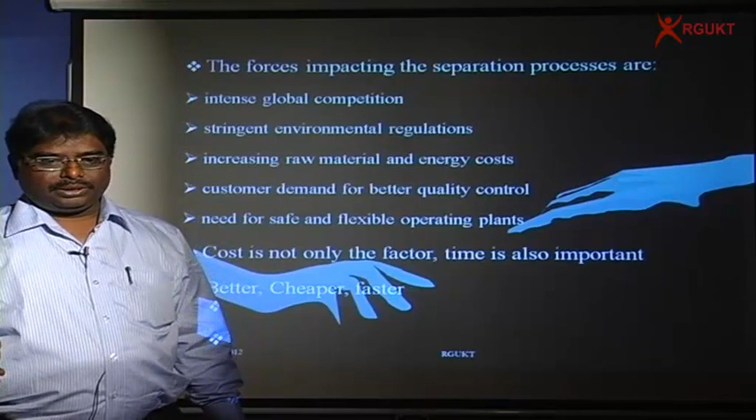Maybe you feel that the course is a mass transfer operation, and we are talking about a separation process. The separation process is an application of mass transfer operations. In your courses, mass transfer operations 1 and 2, the first few modules discuss the importance of transport phenomena in mass transfer operations, but the remaining topics we'll discuss are the applications.

I would like to explain to students the importance of the separation process, and I want to convince you that without a separation process, mankind cannot sustain. Once you understand this, then one can discuss what mass transfer is, how it takes place, how to calculate the mass transfer flux, how it relates to heat transfer and fluid mechanics, and how to conduct mass transfer operations. All those things I would like to explain at a later stage.

So initially, what I want to talk about again is the separation process, the importance of the separation process, why one should think about it. If there is no separation process, nothing is there.

So we were discussing the separation process, different applications of it, and I have already given several applications. In the last class we discussed the forces impacting the separation process. Today the customer wants a better product, a cheaper product, and at a faster rate, and that is only possible with you - with you meaning the chemical engineering students, not anybody else.

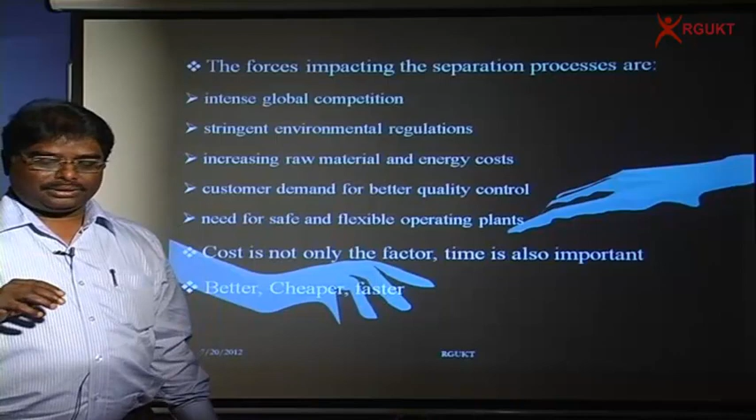With this small introduction, I want to continue my previous class discussion. The above forces are leading to the utilization of multiple separation technologies for certain applications. We don't like to use one separation technology; we want to use multiple separation technologies, innovations at a small scale, and increased use of integrated separation and hybrid processes.

Then improvement in energy efficiency, creation of separation methods for ultra high pure chemicals, development of separation processes for waste management. For example, when we talk about utilization of multiple separation technologies for certain applications, the same example I gave earlier is the ethanol water system.

We get ethanol from the fermentation broth where it contains around 10% alcohol, and that 10% alcohol has to be increased to 99.8% or 99.7% alcohol if somebody wants to use this alcohol for fuel applications, maybe for drug applications.

If that is the case, what one has to do is use distillation, because distillation is a well-known separation technology used for the separation of liquid mixtures.

But as I told you already, unfortunately the system of water and ethanol forms an azeotrope at 95.6% concentration. We cannot use distillation.

We have to go for azeotropic distillation and extractive distillation, where we add an extra component. When you add an extra component, you need to remove this extra component, and the cost of the process increases. So instead of that, what one can think about now - a recent approach - is using a clubbing of multiple separation technologies, not just one.

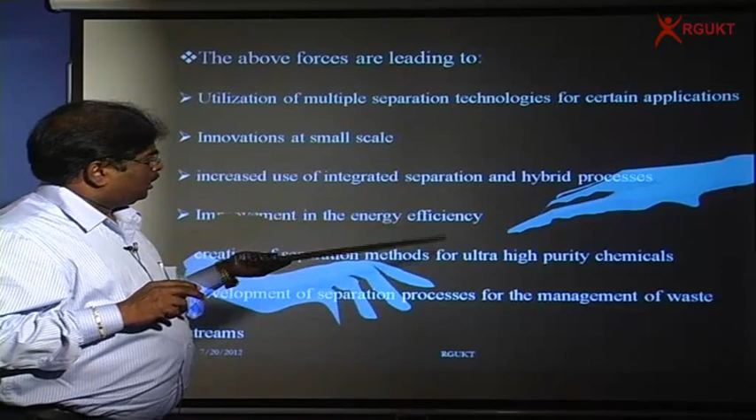Then there are innovations at a small scale, as I already told you about the fuel cell development in Japan by a small company which can produce 1 kilowatt hour. So they are doing whatever innovation they want at a small scale, satisfying the needs at a smaller capacity. So we want to do innovations at a small scale and increase the use of integrated separation and hybrid processes.

As I told you already, we don't like to use just one technology. We use multiple sub-technologies to make the process a hybrid separation process. This is what I spoke about regarding the pulp and paper industry. When you get black liquor, instead of using some other technique, we can use the membrane separation process with ultrafiltration, nanofiltration and reverse osmosis. So we use a hybrid process for improvement in energy efficiencies.

This is what I told you: instead of using distillation and azeotropic distillation, or distillation and extractive distillation, one can use pervaporation, distillation and pervaporation. That will give you more energy efficiency.

To tell you a small story again: if I want to get 99.7% alcohol, and I give this problem to American engineers, they don't design the distillation column to get 99.7% alcohol - they design it to get 99.8% alcohol. When they design for 99.8%, that means excess design, for that extra 0.1% concentration, and the energy costs increase by 13%. But if you give the same problem to Japanese engineers, they design exactly for 99.7%. Why does this difference come about? As I told you, by this time you know a little bit about process dynamics and control.

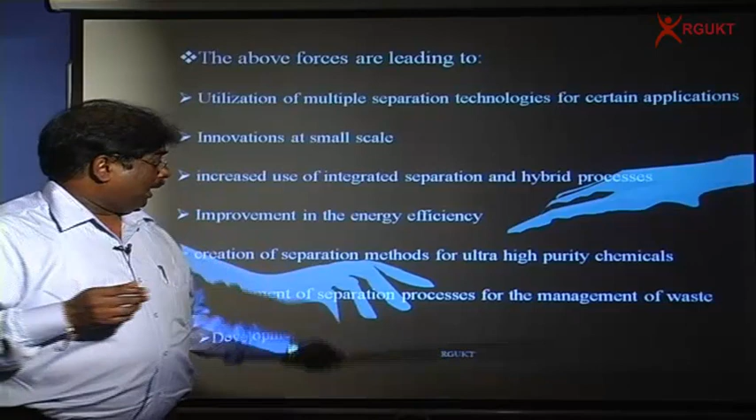Otherwise, the product you get has no value, and no customer is going to purchase it. So there is improvement in energy efficiency and the creation of separation methods for ultra high pure chemicals. When you talk about semiconductor applications, we need high pure chemicals, and to get them we have to use some new separation techniques to produce these ultra high pure chemicals.

To tell you a small story again: people talk a lot about cool drinks. They say cool drinks are not good for health. The same cool drinks we were drinking since maybe 1960 onwards, but suddenly people started talking about pesticide traces in cool drinks, and that one cannot drink them. But these pesticide traces were already there in the cool drinks even in 1960, it's not new. The reason was, earlier the system was not so sophisticated.

Your control systems were not sophisticated, or your measuring devices were not so sophisticated. If the concentrations are very, very small, they are not traced by the instruments, so we are not able to get the concentration. But now, because of developments in electronic systems and electronic materials, we are able to develop advanced instruments like gas chromatographs which can detect concentration even at the ppb level, parts per billion. So what was once called a good material is now becoming a waste material.

Even if that is there, if you don't like to drink a cold drink which has a concentration in terms of ppb, what one can do is use some separation process to remove those low concentrations of pesticides, and provide a cool drink which the customer wants. So we need the creation of separation methods for ultra high pure chemicals. This is what even semiconductor applications require.

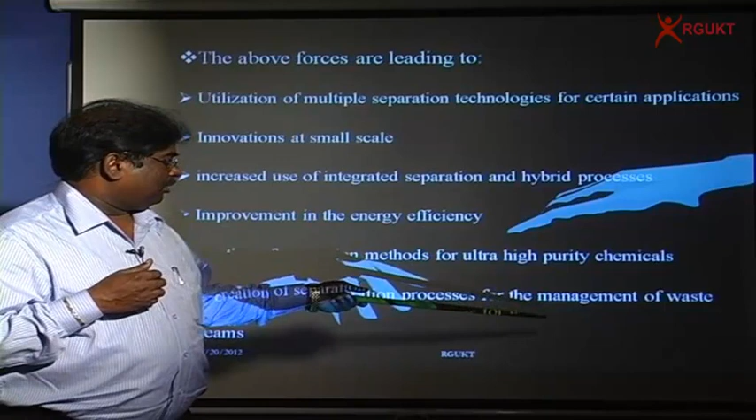So these are the forces that I told you about, the forces impacting and leading to these things.

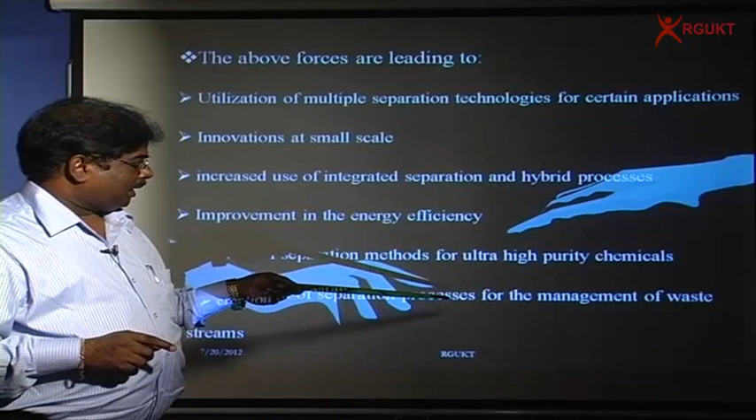So maybe it is a good time for you to look at this course and understand its applications. When you go through these applications, you yourself will feel there is so much scope, particularly in the area of separation processes, in the area of chemical engineering, and I can assure you that you can do wonders in life.

Just to spend one more minute on this: management of waste streams. As I told you, the toluene-water system. If you take any petrochemical industry, the water coming from it may contain toluene, maybe benzene, maybe xylene.

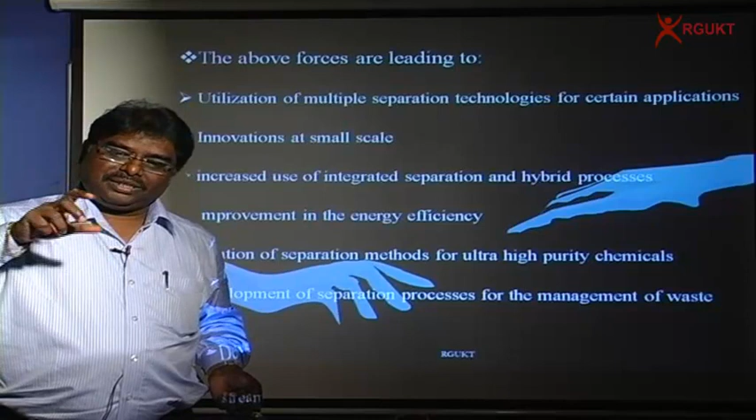When water is alone, there's no problem with its quality. If toluene is alone, there's no problem either. But when toluene and water are mixed, in the presence of water, the activity of the toluene increases. When the activity of the toluene increases, it creates an irritating smell, and we cannot use that water for drinking purposes.

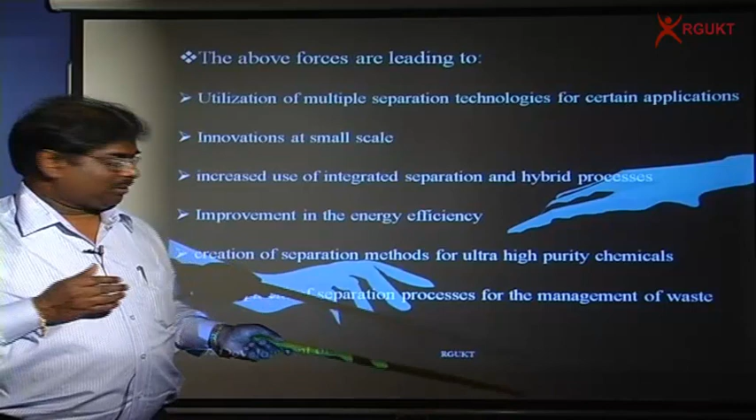So what we are doing is generating waste, and if we continuously generate this waste, someday, as I told you already, there will not be any space to store it.

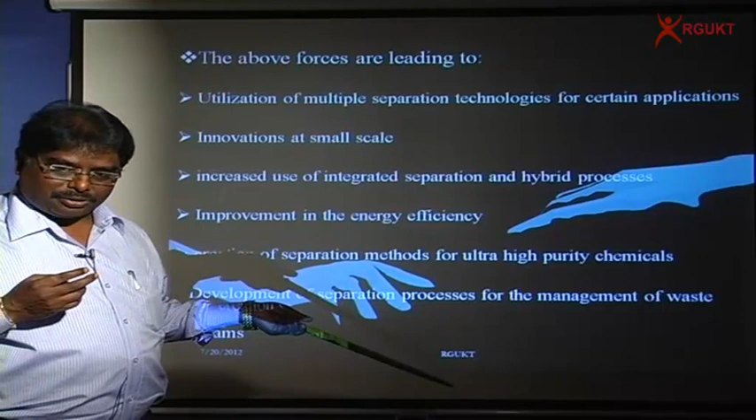So today people are using technologies like carbon adsorption, stripping processes, and pervaporation processes to recover or separate the wastes so that you can use this waste.

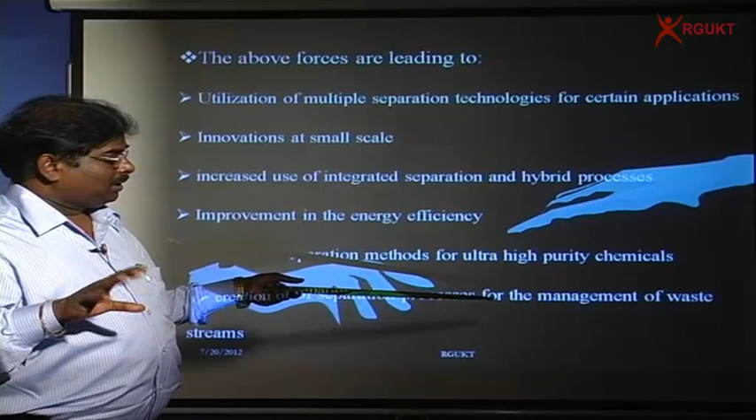Another example: in the case of the pulp and paper industry, we get waste in the form of black liquor. Using a series of membrane separation processes, we get lignin as a byproduct, and this lignin can be used as some sort of adhesive. That is what we are trying to do: the management of waste.

By this time you understand that there are several separation processes available, and for the same product, you don't need to use just one separation process—we can use a series of them. For example, in the ethanol and water system, we can use distillation, azeotropic distillation, extractive distillation, liquid extraction, adsorption, pervaporation, or crystallization.

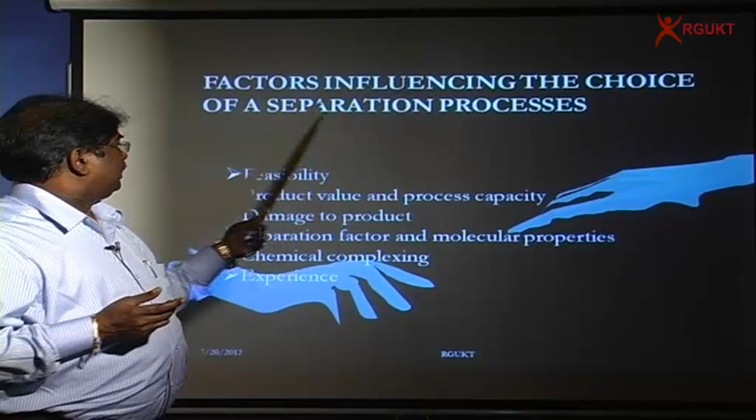So when a customer comes to you with a solution and asks what separation technology to use, you immediately face several doubts about which technology to choose. There are several factors influencing the selection of the separation process: feasibility, product value, process capacity, damage to the product, separation factor, molecular properties, chemical complexing, and experience.

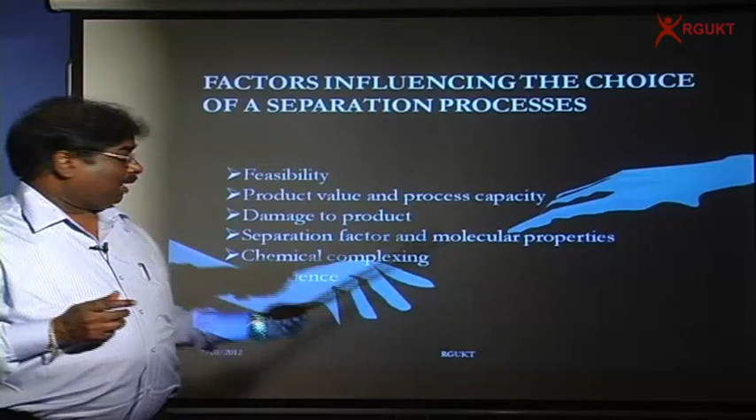These are the factors one should look at. As I told you already, feasibility is the most important thing, and most screening of a separation process can be accomplished on the basis of feasibility alone. We have technical feasibility and economical feasibility. In the case of technical feasibility, when somebody comes and asks you, you have to look at whether it is technically feasible or not.

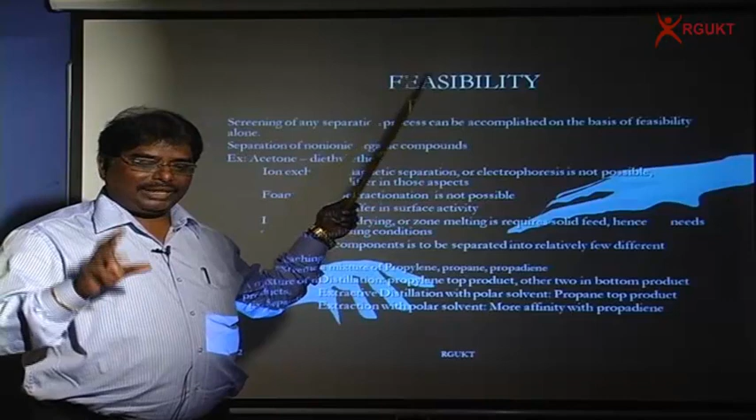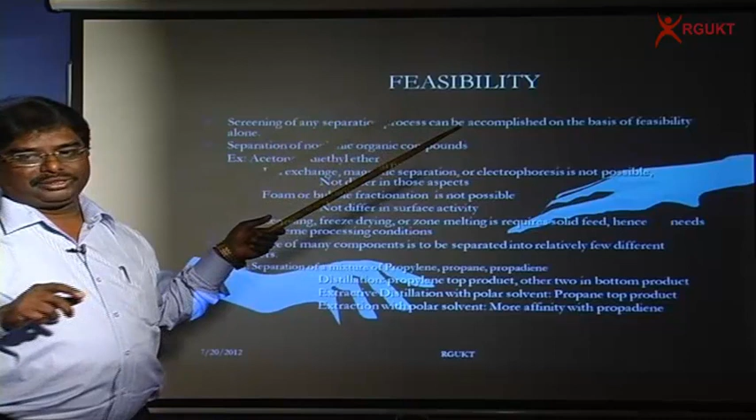Suppose I want to separate isomers, azeotropes, or substances having the same boiling points—I cannot use distillation. So it is not technically possible. When a technique is not possible technically, there is no point in thinking about economical feasibility. So when selecting a separation process, we have to look at two things: first, technical feasibility, whether a given separation process is feasible or not; if it is possible, then we think about economical feasibility; and if economically feasible, then we select that separation process.

For example, suppose I want to separate something—let me give another example. People talk about pitchblende, a mixture of uranium isotopes, uranium-235 and uranium-238. When I want to separate these uranium isotopes, I cannot use distillation, even though I know the energy requirements and costs by distillation are cheaper compared to other separation processes. But I cannot use distillation because these uranium isotopes have the same vapor pressures.

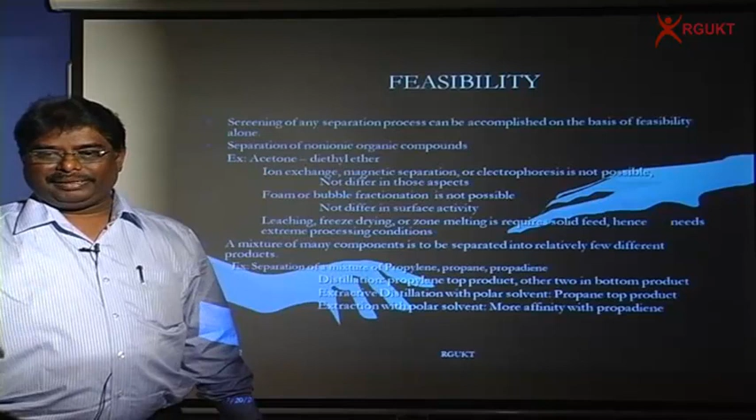So what technique do people use today? Separation of uranium isotopes by membrane gas separation. Even here, this process doesn't give a good selectivity or good separation factor, but even today there is no other separation technology besides gas separation by membranes for uranium isotopes. If you look at a uranium isotope separation plant, there will be around 300 to 400 stages, and you go through some sort of corridors—that is a very interesting application to see.

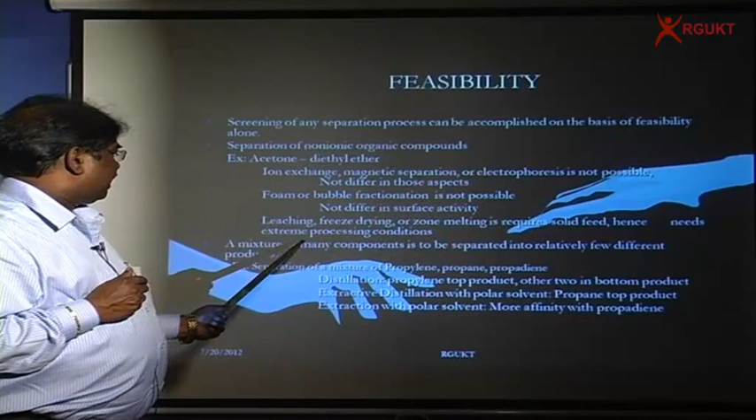Similarly, for acetone and diethyl ether, we cannot use ion exchange, magnetic separation, or electrophoresis, because there isn't much difference in those properties. We cannot use foam separation or bubble fractionation because there isn't much difference in surface activity. We cannot use leaching, freeze drying, or zone melting either—leaching requires a solid feed and extreme processing conditions. Since acetone and diethyl ether are both liquids, you would have to reduce the temperature to convert the liquid into solid, then add a solvent to leach it. Going to such extreme processing conditions is very difficult, which is why we never consider leaching to separate acetone and diethyl ether.

Similarly, a mixture of many components is to be separated into relatively few different products. Example: separation of a mixture of propylene, propane, and propadiene. If you use distillation, you get propylene as the top product, with the other two as bottom products. If you use extractive distillation with a polar solvent, you get propane as the top product.

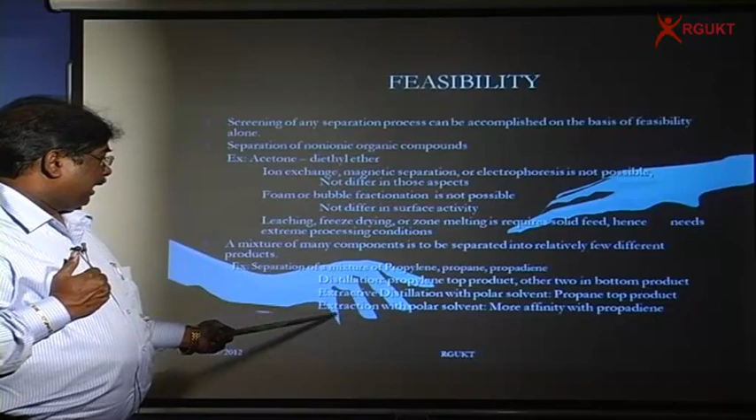And if you use extraction with the polar solvent, the propadiene goes to the other side, and you end up with propylene and propane together. So what I want to tell you is, if you have a mixture of propylene, propane and propadiene, it depends on what is the desired component for you. You can select distillation, extractive distillation, or extraction with a polar solvent. So feasibility is the most important point one has to look at.

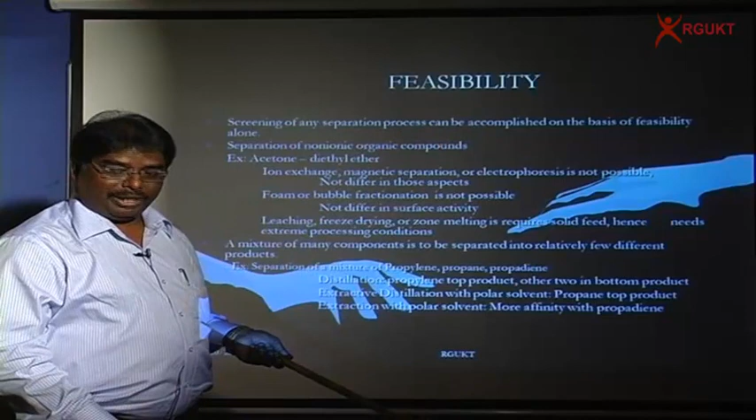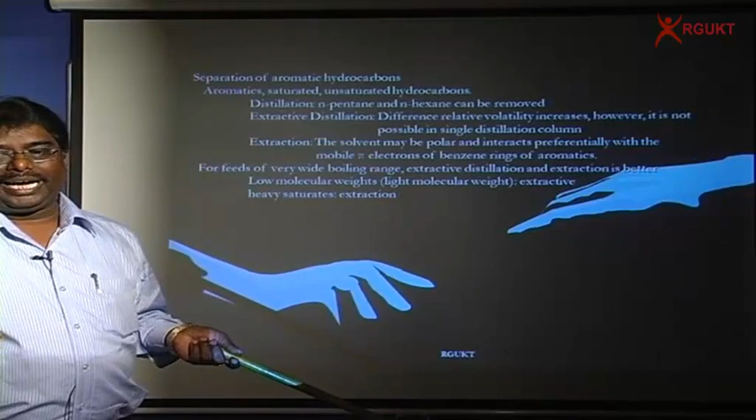Then the separation of aromatic hydrocarbons. Many of you know today there is a challenging task for the separation of aromatics and aliphatics, particularly C5 to C12 compounds. When you take crude petroleum, one of the streams you get contains C5 to C12 aromatics as well as aliphatics. And when you want pure forms, what happens is there is an overlapping of the boiling point temperatures. Because of this overlapping, we cannot separate it by distillation.

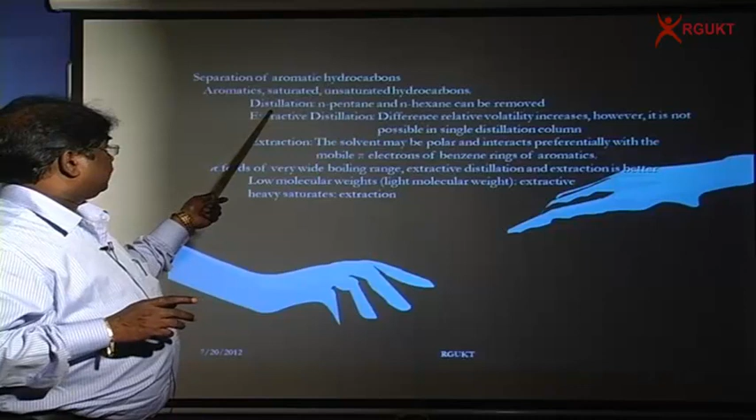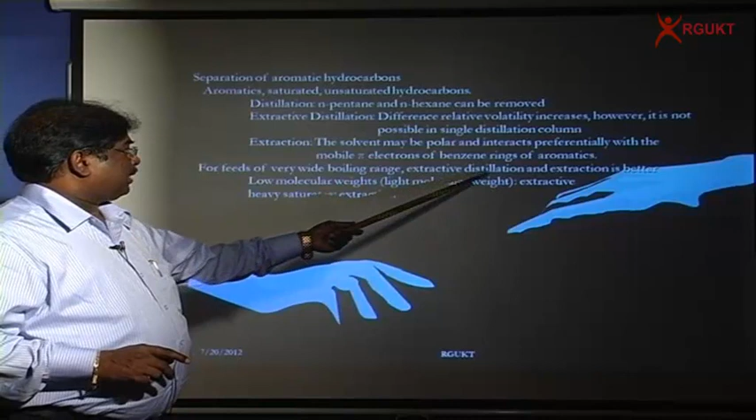So you can use extractive distillation, or you can use extraction. For feeds of very wide boiling range, extractive distillation and extraction are better. For low molecular weights and heavy saturates, we can use extraction. And this is what I told you already.

The product value is the most important thing. What is the product that we are going to get? What is the value of the product? Based on that you have to select a separation process. To give you one small example: cleaning of clothes, particularly a silk saree.

What we can do is take a silk saree and wash it, and after washing it we have to remove the excess water. If you want to remove this excess water, you have to squeeze it. When you squeeze it, the water in the cloth gets expelled, and you get the saree back, but by the time you've squeezed it, your saree gets damaged. Your product is getting damaged. Your product is a high value saree, and using a technique called squeezing causes this damage. So the reason is we go for a technique called drying operations instead.

In the case of the drying operation, we have a saree, and we have to wash it, but we are not going to wash it with water, we are going to wash it with some organic solvent. That is what we call dry cleaning. When you do dry cleaning, you use organic solvents, and wherever mud and other particles are present, they get transferred to the solvent layer, and finally your saree contains some amount of that organic solvent here and there. So what we use...

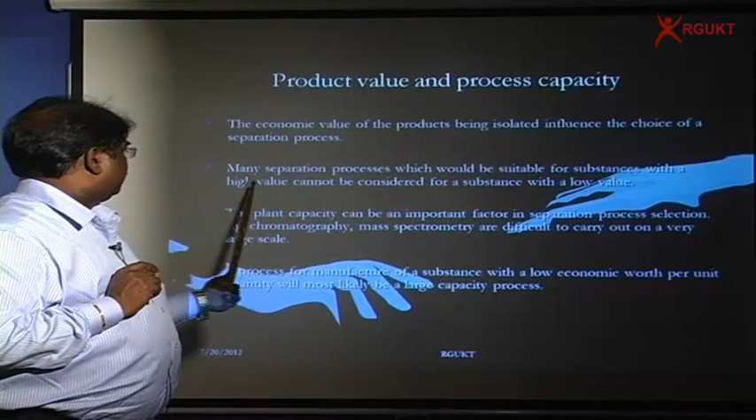...is a technique called drying, where we pass dry gas. When we pass the dry gas, whatever organic compounds are present, which is nothing but methylene chloride, gets transferred to the gas phase, and you get the saree back with no damage to it. This is what I told you: the product value is the most important thing, and based on the product value you have to choose the separation process. Many separation processes suitable for substances with high value cannot be considered for substances with low value. And another important factor we have to look at...

...just to give you one more example for product value: nowadays everybody talks about refined oil. As you know, to get the oil, say groundnut oil, which we use for cooking purposes, we have groundnuts that contain oil, and what we do is crushing. When you do the crushing, the oil gets expelled, and now that oil will be there, along with the cake.

We use filtration. When you use filtration, the oil will pass through the filter cloth, and you are going to get oil. The quality of the oil is not that good, and if you want to sell this oil in places like Banjara Hills, it's not possible, because the customer is expecting a high value product.

Then alternatively, one can think about a leaching process. In the case of leaching process, we have oil seeds. What we do is contact them with hexane solvent. When you contact with the hexane solvent, the oil has affinity with the hexane solvent. The oil will be transferred to the hexane layer, and the impurities are going to be left over.

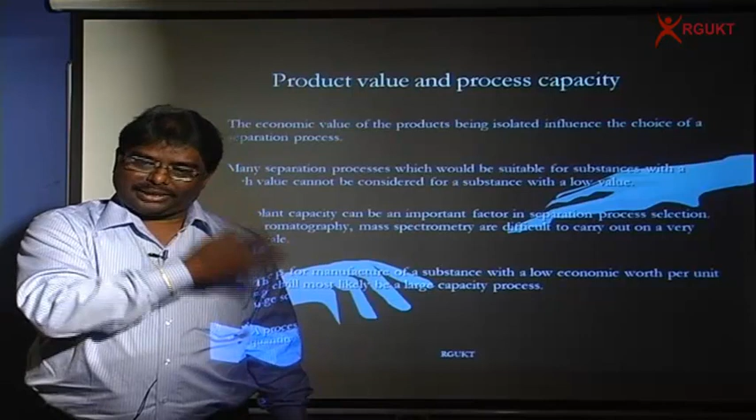So in both cases we are going to get groundnut oil only, but the cost of the groundnut oil may be 40 rupees when you use mechanical operations like crushing and filtration. When you go for mass transfer operations, the cost of the oil may be around 80 or 90 rupees. So whatever that extra 50 rupees is, you are spending towards the separation technique you use.

This is what I told you - nowadays you find so many mineral water plants everywhere. Somebody is selling at 20 rupees, somebody at 50 rupees, and sometimes we feel this fellow is trying to cheat me by selling at a higher price. That is not right, because the other one may be using good technology, maybe a good reverse osmosis membrane, while this fellow may not be using a good reverse osmosis membrane. That is the reason the product quality is less, and because the product quality is less, obviously the cost will be less. So the product value is the most important thing.

Similarly, process capacity is the most important thing. You have to see whether you are working with grams, kgs, or million kgs - whether you're working with milligrams or with million kgs.

For example, when you want to separate ethanol and water, if the ethanol concentration is very, very small - let's say maybe 1 milligram - I cannot use distillation. If I use distillation, whatever 1 milligram is there will stick to the walls of the distillation column, and nothing comes out. Whereas you can use the chromatographic technique, and when you use it, we can nicely separate that 1 milligram raw material containing ethanol and water. Maybe 0.1 milligram of ethanol you may get, and 0.9 milligrams of water.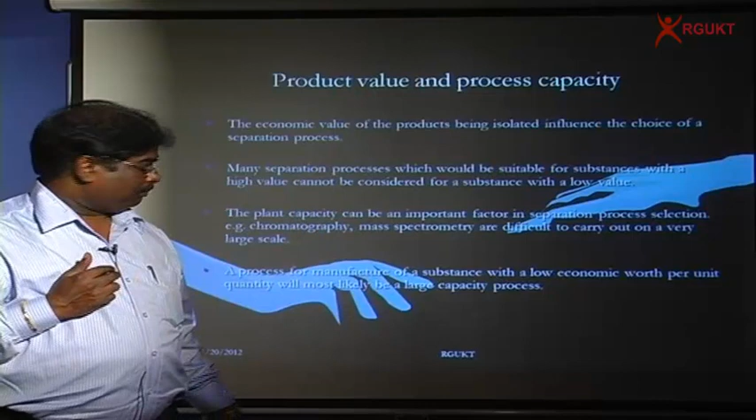So what I want to tell you, the plant capacity is the most important factor, and based on that we are going to select the separation process. A process for the manufacturing of a substance with a low economic worth per unit quantity will most likely be a larger capacity process. And if cost is less, that means the capacity is larger. So based on that, one has to select the separation technique.

Damage to the product, this is what I told you already, sometimes there will be damage to the product, and one has to consider this damage. As I already gave you an example where I spoke about the artificial kidney and lungs being damaged by heat and addition of foreign substances. If you use impure water, your product gets damaged, that is your blood gets damaged, because the impurities are transferred from the dialysate chamber to the blood chamber.

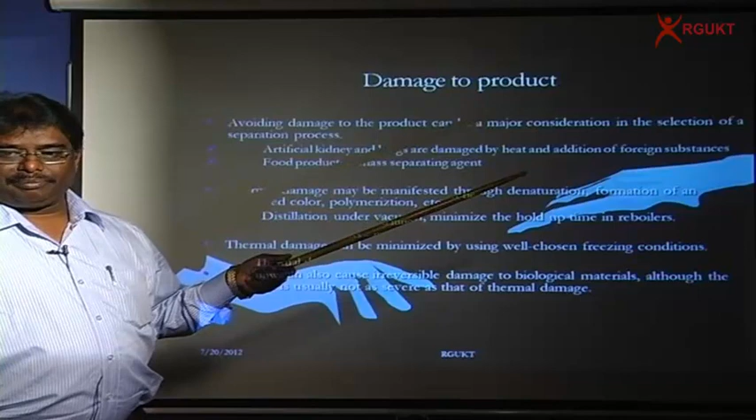At the same time, as I told you about the dairy industry, for making milk powder from milk, if you use a technique called evaporation, the boiling point temperature of water at 1 atmospheric pressure is 100 degrees centigrade, and your milk gets damaged. So avoiding damage to the product can be a major consideration in the selection of a separation process, and thermal damage may be manifested through denaturation, formation of unwanted color, polymerization, etc.

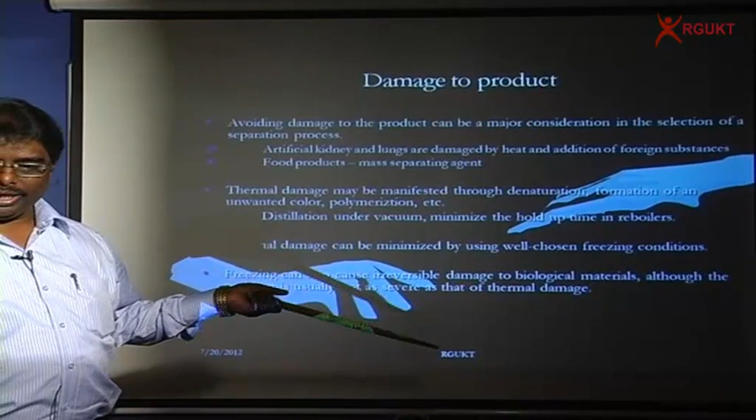That is what we are presently working with, a topic on lactic acid. When working with lactic acid, if you do the separation using distillation, there is formation of polylactic acid. That is what I mean by polymerization. If I get polylactic acid, there is no use of that polylactic acid. So that means some sort of thermal damage is taking place, and I don't want such type of thermal damage.

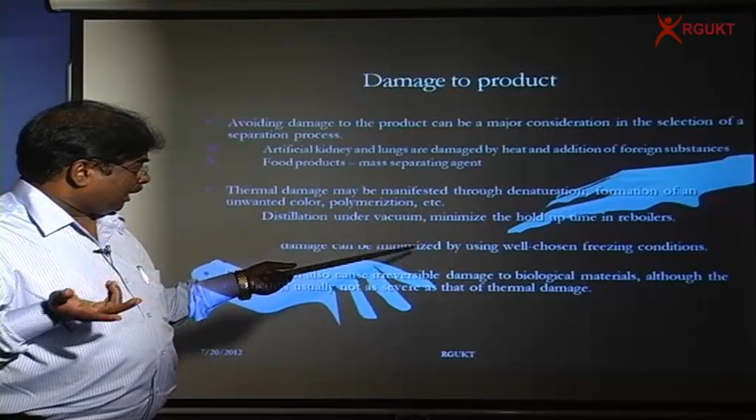To avoid such type of thermal damage, we have to do the distillation under vacuum. Maybe we have to reduce the hold up times in the reboilers. Maybe instead of using an energy separating agent, one can think about barrier separating agents. Thermal damage can be minimized by using a well chosen freezing condition, and freezing can also cause irreversible damage to biological materials.

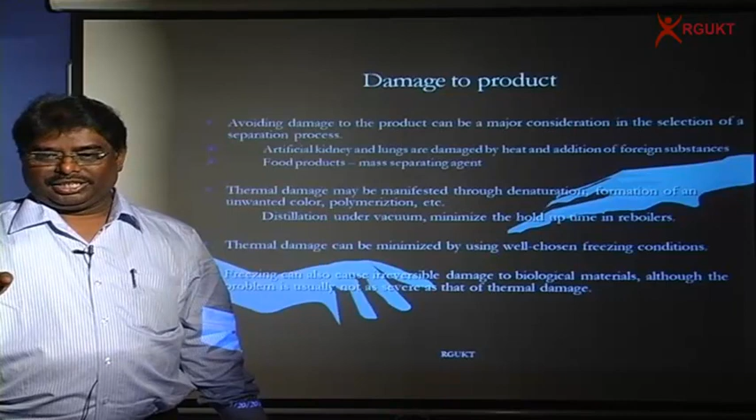This is again a small thing. I don't know how many of you know about liquid nitrogen. The liquid nitrogen temperature is around minus 196 degrees centigrade. If you take a rubber tube, you know how flexible that rubber tube is, and if you keep this rubber tube in the liquid nitrogen for some time, when you take it out, it is no more a rubber tube, it will be like a steel rod. So what is happening? Because we are doing some sort of freezing, the tissues or polymer materials get damaged, and permanent damage may occur in some cases.

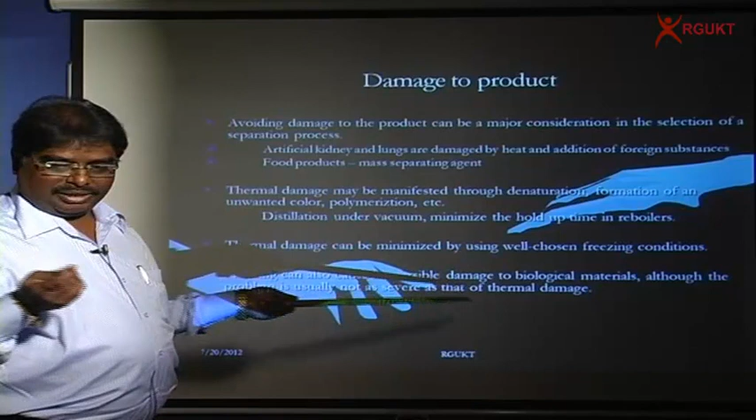That is what I told you, particularly when talking about storing something like liquid nitrogen falling onto your body. We have biological tissues in the body, and these biological tissues get damaged. So the separation technique that we are going to use should avoid such type of damage to the product.

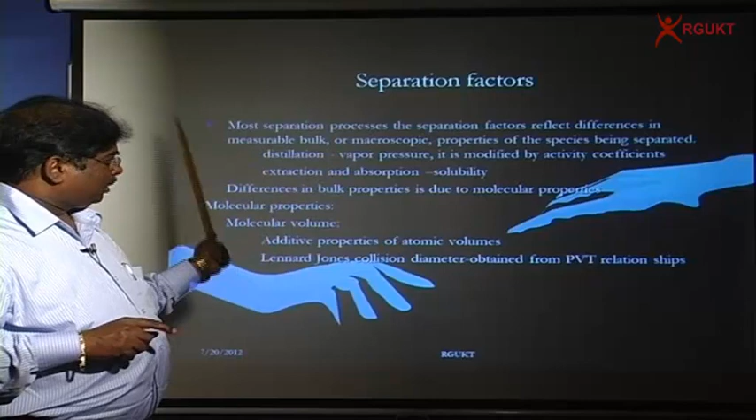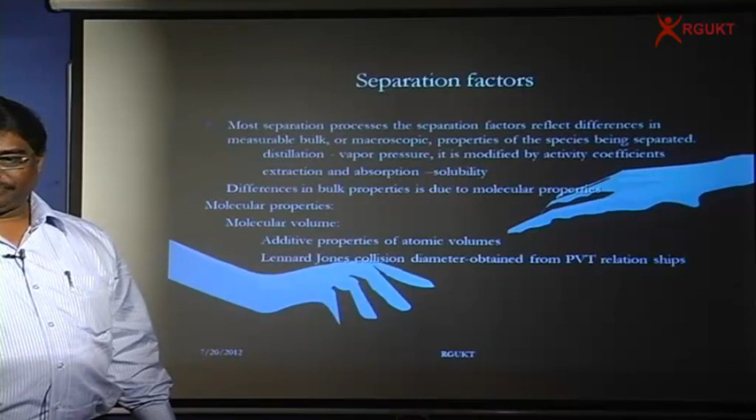The separation factors, we can discuss more about the separation factor at a later stage of the coursework, because we have to discuss what is a separation factor, what is a stage, and other things. But the separation factors are going to play an important role. That is what I told you. When I want to separate uranium isotopes using distillation, the relative volatility or separation factor is only 1, and I can't use distillation. Whereas if I talk about gas separation by membranes, the separation factor is only 1.0043. Even that small value is attracting people to use gas separation by membranes for the separation of uranium isotopes.

So if the separation factor is more, the cost will be less. So what you have to see, what you have to choose, for example when you talk about the acetic

acid water separation—many of you know about vinegar. Vinegar is 4% acetic acid, and when you want to separate vinegar and water, one can use distillation, but there is a strong bonding between water and acetic acid, so the relative volatility is very, very small. Instead of distillation, one can think about using liquid extraction with benzene as a third solvent, or chloroform as the third solvent. That will be better.

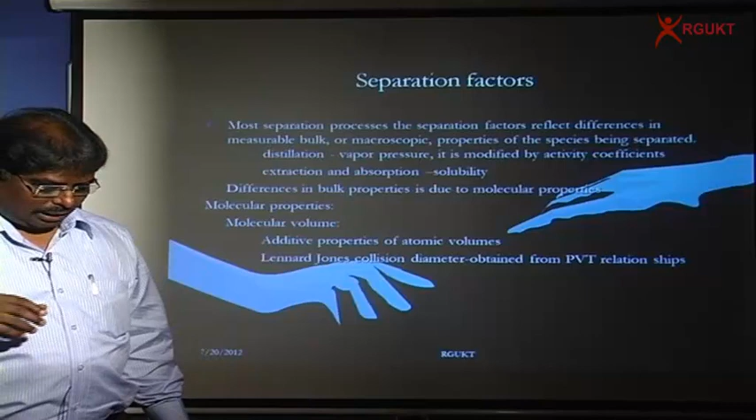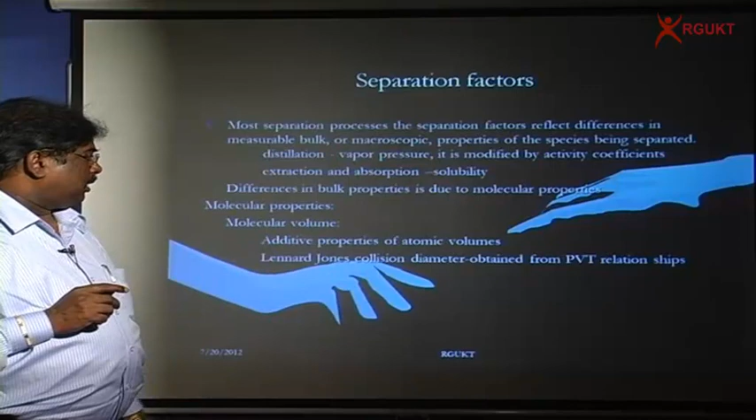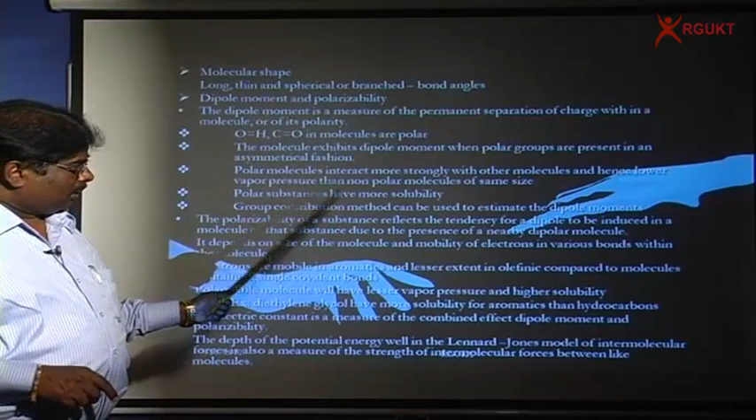So what we have to see is the separation factors, and these separation factors are going to depend on the Lennard-Jones collision parameters, which you already encountered in your chemical process calculations when reading about vapor pressure, attractive forces, and repulsive forces. This depends on several things. I'd like to leave this as material rather than discuss it, because it's too difficult for you to understand at this moment, but this will be an important slide for your future studies.

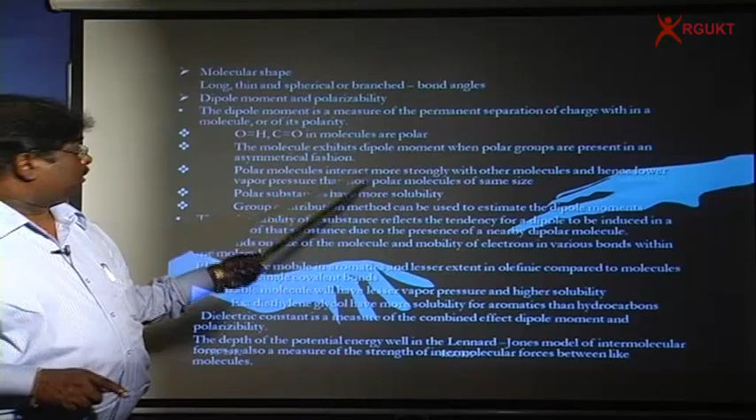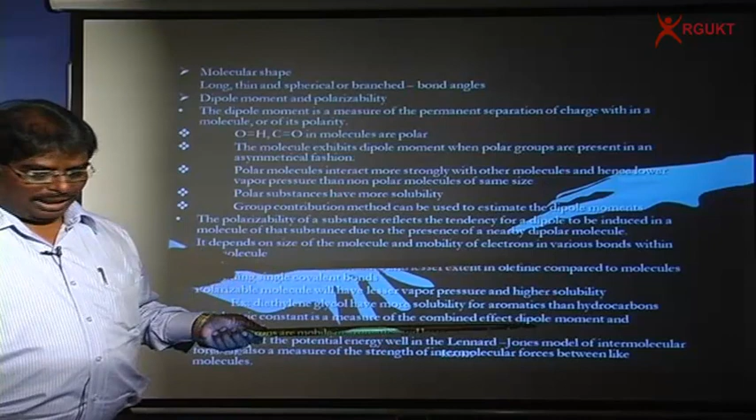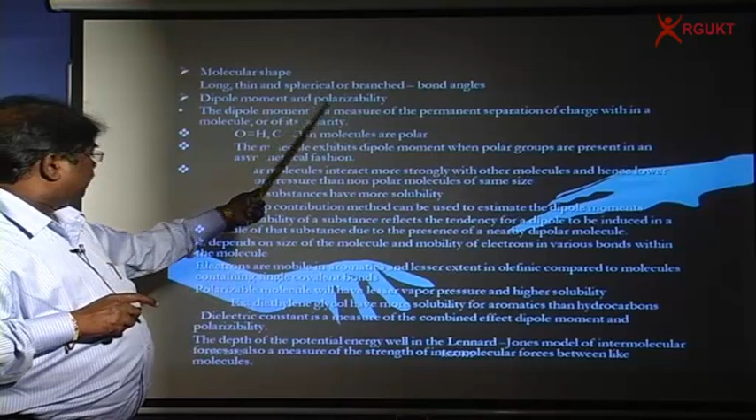Because you've studied so many things in physical chemistry and thermodynamics—dipole moment, polarity, polarizability, Lennard-Jones potential—all these combinations we use for selection of the separation process, where selectivity or the separation factor is the most important thing. The selectivity or separation factor depends on the molecular shape, the dipole moment, the polarizability, the dielectric constant, and the Lennard-Jones potential. All these things help you calculate the separation factor.

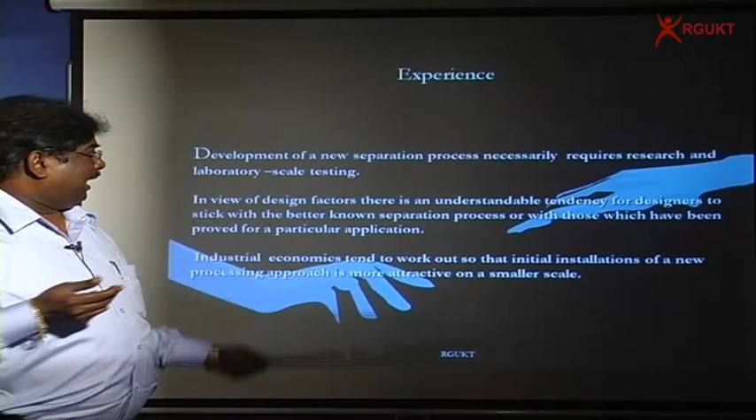Based on that we can select a separation process for a given application. And above all, experience is the most important thing. I may know that a particular separation process is good for separating a given material, but if I don't have experience with that process, there's no point talking about it. Development of a new separation process necessarily requires research and laboratory scale testing.

This is what I told you—I did my PhD in the area of pervaporation process. I know that pervaporation will work nicely for separating liquid mixtures. But if an industry wants to use pervaporation technology as an alternative to distillation for separating liquid mixtures, they need somebody with expertise in that area. But it's so difficult to find people who work in pervaporation, because it's not a conventional process, it's a non-conventional process.

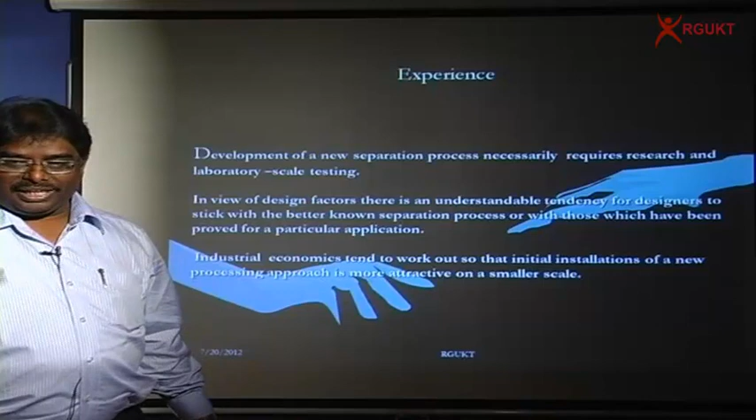So the experience is the most important thing. Ultimately, whatever else you consider, experience is the most important thing. If you don't have experience in a particular separation process, you should not select that process. So to give some examples, as I told you, technical feasibility is important, product value is important, plant capacity is important, selectivity is important, and experience is important.

For example, if somebody wants to separate water and sodium chloride—this is such a common substance, everybody knows this solution—we can use evaporation, we can use crystallization, we can use reverse osmosis, and we can also use electrodialysis process.

As I told you, when you go for evaporation, you have to give a lot of energy. When you go for crystallization, you get nice crystals. When you go for reverse osmosis or electrodialysis, on one side you get pure salt, on the other side you get pure water. So whether you select evaporation, crystallization, reverse osmosis or electrodialysis depends on the application you are looking at.

Then we have a separation of acetic acid and water mixture. As I already told you, acetic acid is one of the important organic compounds other than ethanol. Vinegar is 4% acetic acid and 96% water, and acetic acid's boiling point is 118 degrees centigrade while water's boiling point is 100 degrees centigrade.

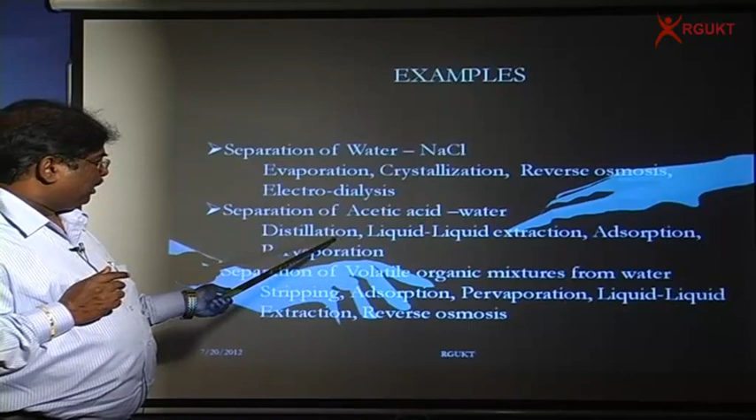Even though there is a large boiling point difference, one cannot use distillation because there is a strong bonding between acetic acid and water. Water is the more volatile component here, acetic acid is the less volatile component, and water requires large amounts of latent heat of vaporization compared to organic compounds. So in distillation you have to evaporate the water, giving large amounts of latent heat of vaporization. So distillation may be technically feasible, but economically it is not a feasible technique.

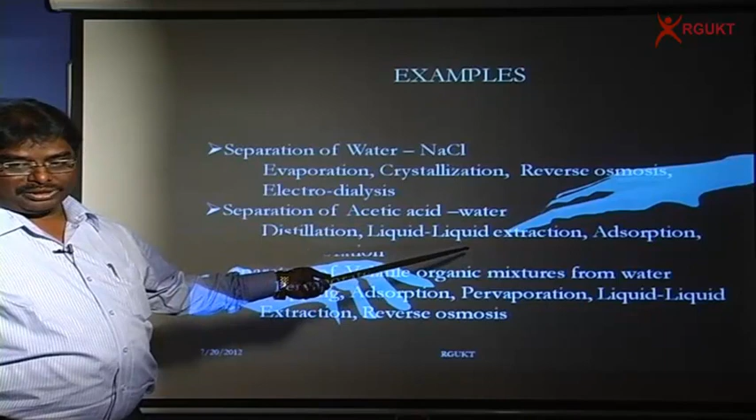Similarly, we can use liquid extraction by contacting the acetic acid-water mixture with toluene, benzene, or some other compound. Then we can use adsorption, where we take an adsorbent having affinity either with acetic acid or water, so one component is adsorbed and the other passes through the adsorption zone, and then we do regeneration. That way one can separate acetic acid and water. You can also use pervaporation.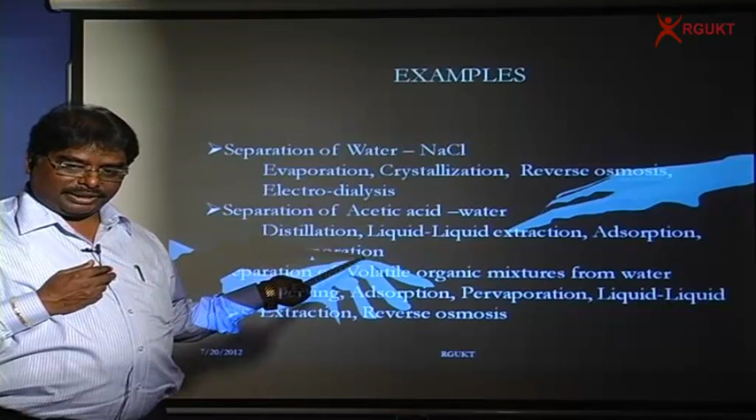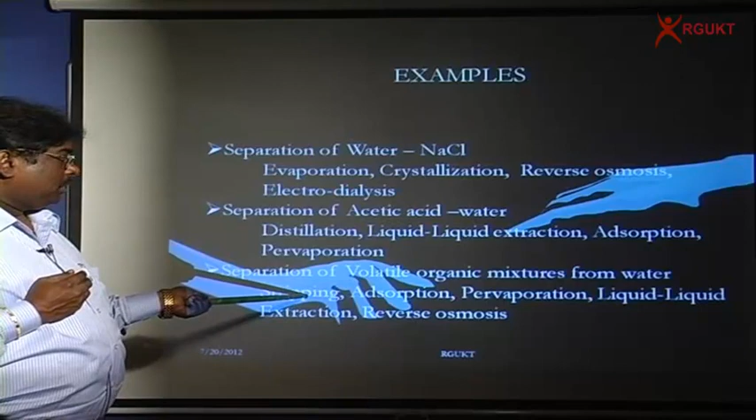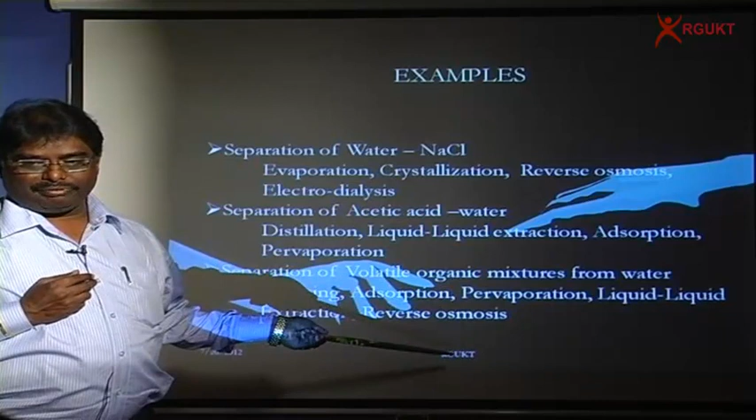This is a membrane separation technique used for separation of liquid mixtures, and there is much research going on in pervaporation, but it is still in an infancy state. There are several separation techniques for separating acetic acid and water. Similarly, for volatile organic mixtures from water, we can use stripping, adsorption, pervaporation, liquid extraction, or reverse osmosis. Each technique has its own advantages and disadvantages. Which one we select depends on the factors we discussed earlier.

There is so much literature available on separation processes, and newer technologies and new separation processes are being developed. Still, this Vision 2020 Separations Roadmap developed by AIChE, the American Institute of Chemical Engineers, for advanced waste management in cooperation with the US Department of Energy, shows they want to work on adsorption, with new adsorbent materials, tools to predict adsorbent performance, and a better understanding of the physical phenomena underlying adsorption.

Every material can be used as an adsorbent material; even waste can be used as an adsorbent. We now have so many adsorbents, and these may be good for separating particular materials. Presently the whole world is working on adsorption processes to identify new adsorbent materials and tools to predict adsorbent performance. When you select an adsorbent, the next question is how good it is, so we have to predict its performance, and then understand the physical phenomena better.

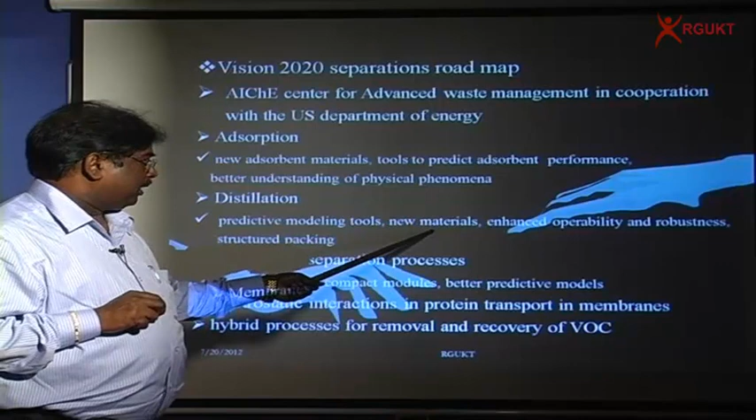People talk about distillation as a very old technique where nothing new can be done, but there are many new areas one can work on in distillation. There may be predictive modeling tools, new materials, enhanced operability and robustness, and structured packing. This is what we are going to discuss at a later stage.

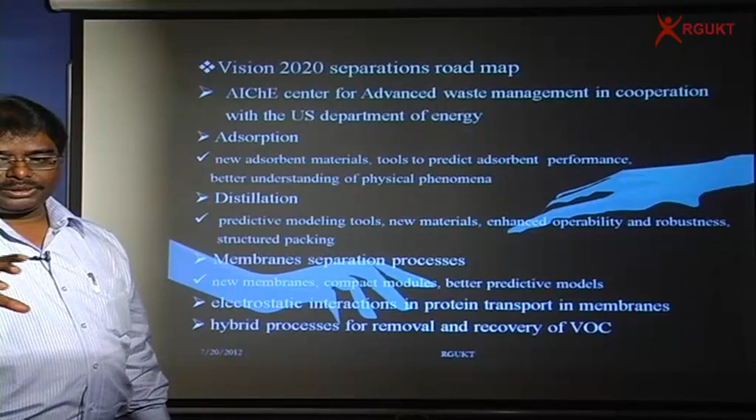To conduct any separation process, we need some sort of a vessel, and that vessel we call the packed tower. In the case of packed towers, we have random packing and regular packing, each having its own advantages and disadvantages. People want to work with structured packing particularly when they want less pressure drop.

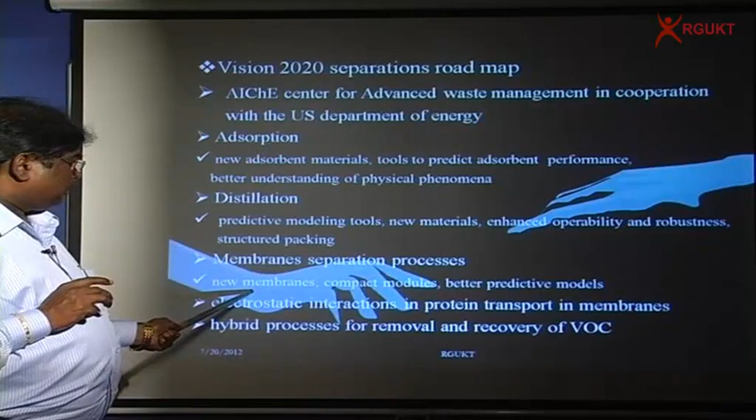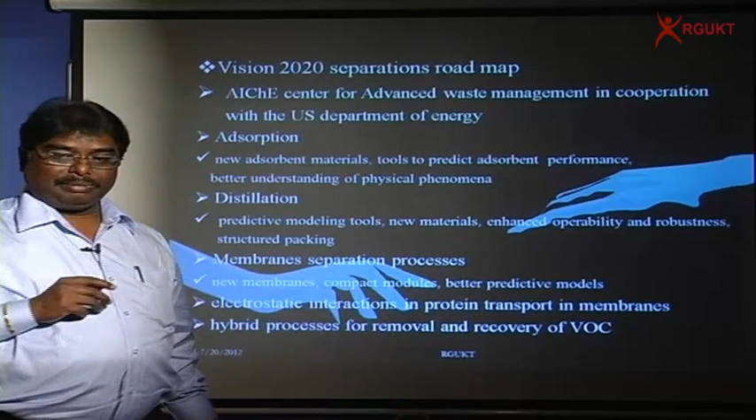Another area people are looking at now is the membrane separation process. Similar to adsorption with new adsorbent materials, here we have new membrane materials and compact modules. The module size should be as small as possible but give the larger area. Then better predictive models, and one more area people are working on is electrostatic interactions in protein transport in the membranes. This may be a hybrid process for the removal and recovery of VOCs.

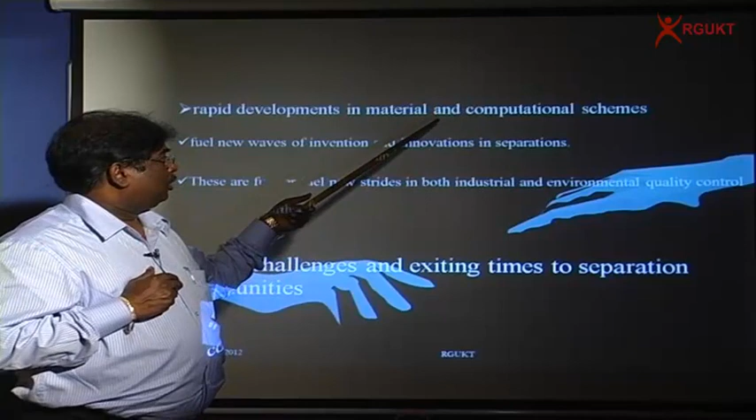What is going on now is the rapid development in material and computational schemes. Chemical engineering is highly nonlinear, and the equations we get are highly nonlinear equations. The computational schemes available in the olden days were not good to solve these highly complex, highly nonlinear equations. But so much is going on in mathematics, particularly in computational areas, that even though the equations are very complex, one can solve them, and your design may be very close to the actual design.

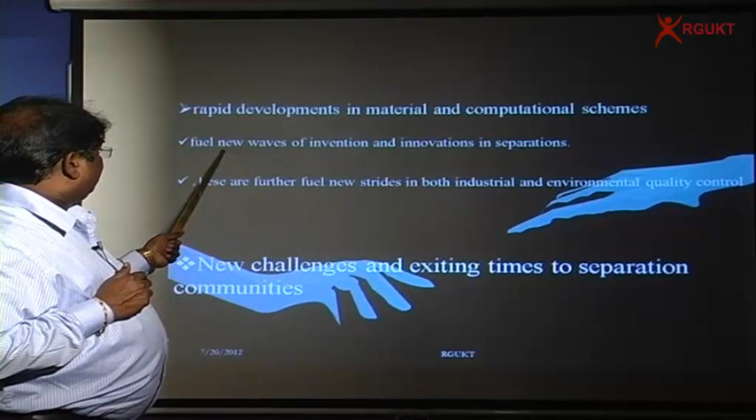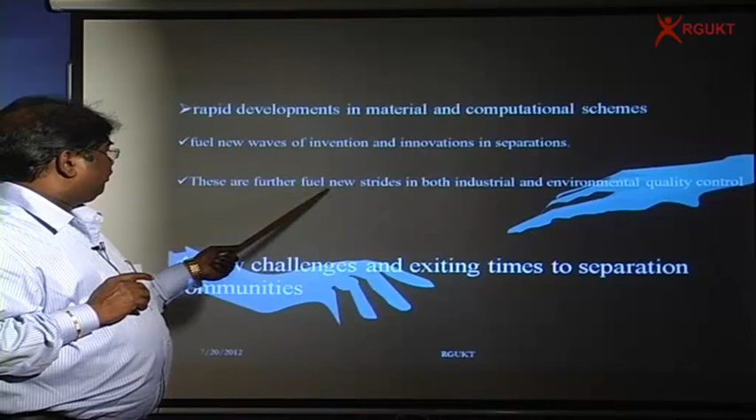It will fuel new waves of inventions and innovations in the separation process. Material technology, new materials, and new computational schemes are providing a platform for innovations and inventions in separation processes, and these further fuel new strides in both industrial and environmental quality control. There are new, challenging and exciting times for separation communities in the future.

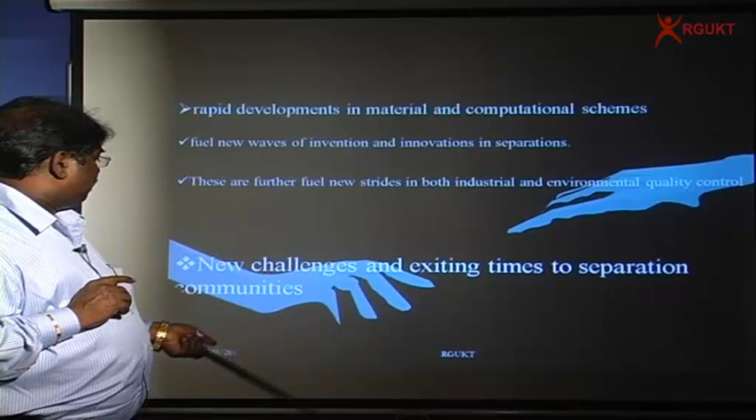This is what I want to tell you about the importance of the separation process. I understand it may be difficult to grasp this many separation processes at this stage, but unless you understand the importance of the separation process, you won't enjoy the course of mass transfer operations. So whenever you get an opportunity, look at the applications of mass transfer operations.

There are several operation techniques, and even in public you may encounter problems you should be able to solve. There are several challenging problems, and maybe a simple case is LPG separation. It contains propane, propylene, and a mixture of propane and propylene. You have to separate this propane and propylene, and this separation is not so simple a task.

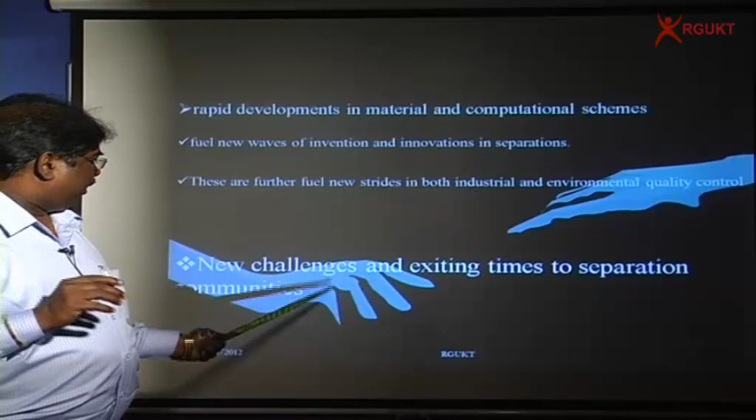That means with alkanes and alkenes, we have a mixture, and there is an overlapping of the boiling point temperatures. Because of this overlapping, we are unable to separate the alkanes and alkenes, and because of this we don't use either pure propane or pure propylene, but a mixture of propane and propylene. So there are challenging and exciting times for the separation communities.

This will help you follow thoroughly your course on mass transfer operations. We can divide the total syllabus into 8 modules, covered in around 35 to 36 classes. Out of these, the first 4, maybe 5 modules, basically consist of transport phenomena in mass transfer operations, similar to heat transfer and fluid mechanics. If you have good experience and knowledge in heat transfer and fluid mechanics, it is easy to understand the first 5 modules, and the remaining 3 modules are basically applications of mass transfer operations.

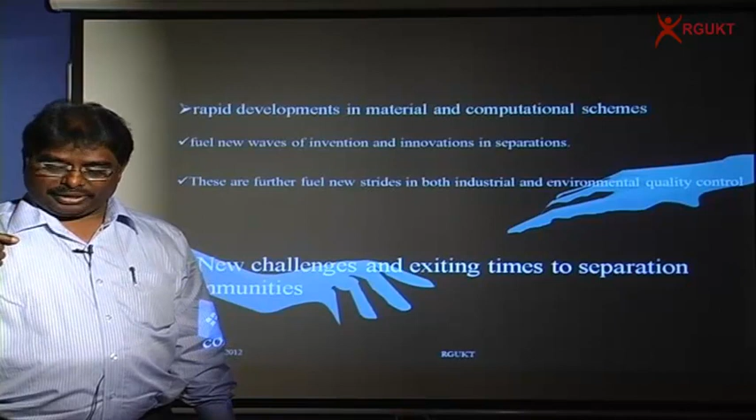That is nothing but the separation process, whatever we are discussing now - drying, humidification and absorption process. This whole thing we can cover in 35 to 36 classes. For the syllabus, a very good book is Mass Transfer Operations by Treybal. Then Principles of Mass Transfer and Separation Process by Indian author B.K. Dutta, which is one of the very interesting and good books.

Other than this, we have Geankoplis as well as Seader and Henley. Whichever you like, you can follow, but mostly I will be following Mass Transfer Operations by R.E. Treybal, the 3rd edition of McGraw-Hill Publishers.